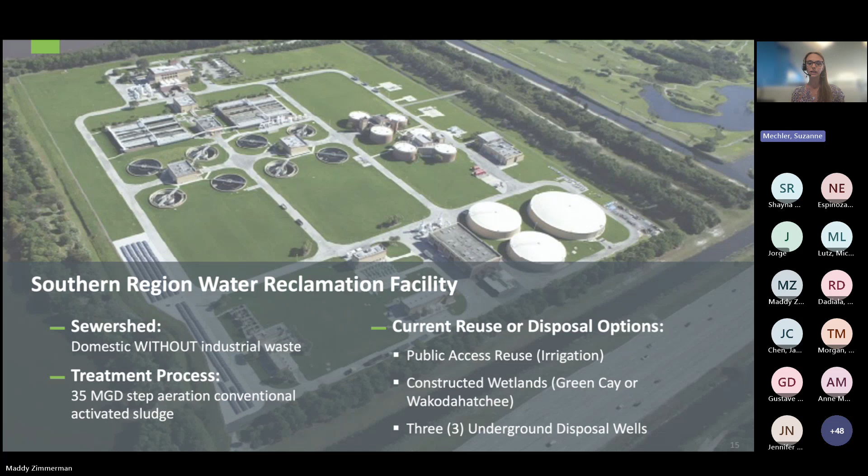They've been using reclaimed water to discharge their created wetlands, raised boardwalks, huge birding locations, and very successful in the community. So this project is going to leverage the reuse to a higher quality level that allows closer interaction with the population. It's still officially indirect potable reuse as defined by the rules. It is treated to drinking water quality and then stabilized for the lake system.

The Green Cay Park is being created using existing farmland that Mr. Winsberg, who is an amazing person, about 90 something years old now, decided that he wanted to work with the county to utilize this land for public good, and not sell it for development and other things. So he was a key player in this. You can see how important the location of this facility is for a really successful indirect potable reuse project.

We do have to get it from the water purification facility to the park, but we are able to put wells on the site, and those wells are relatively close to the water treatment plant. So it really connects well with the system. And even though it's not a direct system, the indirect and really aquifer recharge is critical for them.

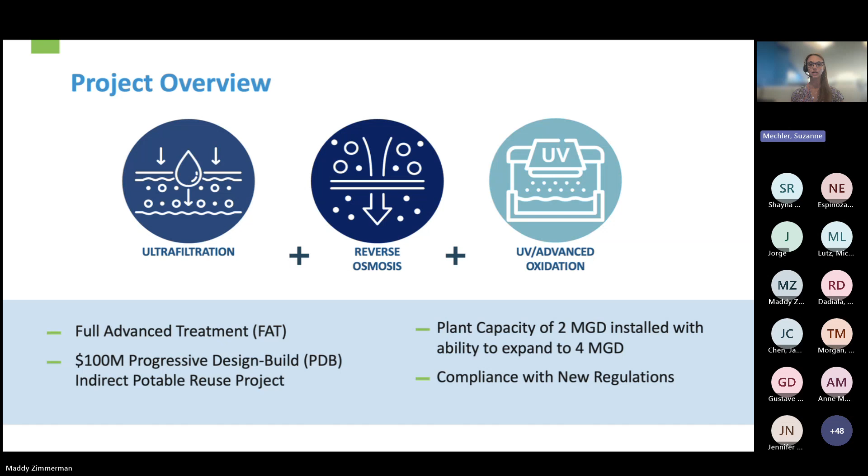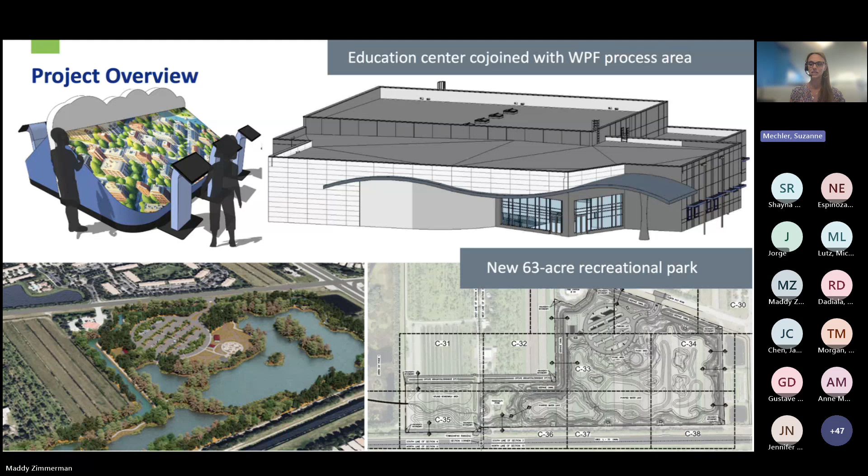I tried to organize this a little bit to talk to this group about how you can connect digital to reuse. I'm going to go through a couple of things that I think are the connectivity everybody should be considering. One of the things we had to do, required for all new projects under the new permits in Florida, is the source water characterization and evaluation.

This is critical because you need this, which is the new requirement, to get approved prior to doing any project. This really sets the stage of what you need to do differently than currently as far as tracking data and understanding the data and your sources. This is an area I think can be leveraged for digital analysis and use in the future, because we do see gaps in the current information used in typical industrial pretreatment programs.

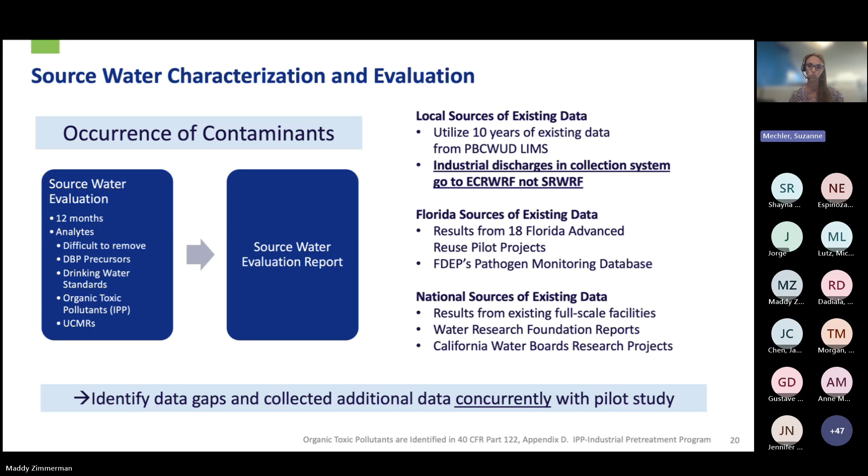This data has been used for the pilot studies. Pilot studies are obviously dependent on making sure you're actually piloting to your source water. So a lot of that connectivity is critical.

Another area we explored during the pilot is really thinking outside the box in how we're able to leverage the data. As part of our full-scale pilot, with all three treatment units connected, we got approved for a Water Research Foundation paper.

It's WRF 5209, which evaluated giving membrane the virus removal credit using rapid in-field molecular-based methods. Our team did a paper, and it's out there, published around February 2023. The key here is that we'll be making real-time decisions in reuse, and to protect the public, real-time information and rapid results are important to prove the success of what you're doing to the community, and to manage issues as they arise. These new ways of evaluating and capturing data in the field in a more real-time, rapid way, especially at this virus level, will be key, and I think it's something all of our projects should consider.

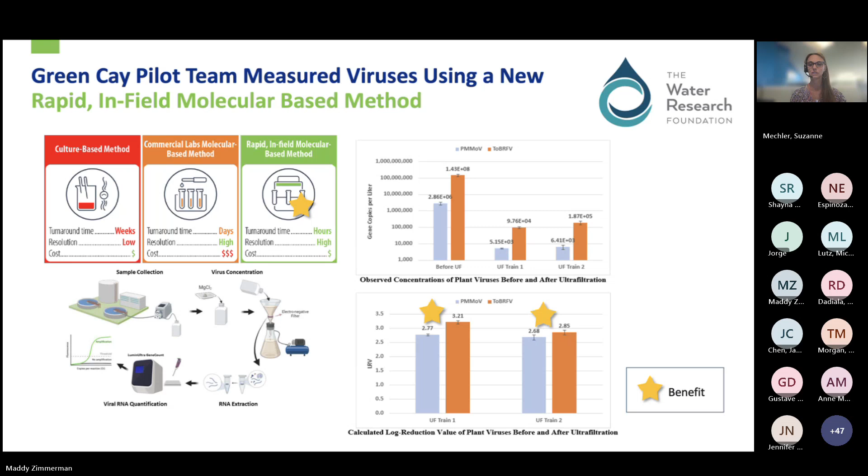I'll try to go into the permitting a little bit. We're following JEA as far as the process, so we'll leverage everything we learned from them. We'll likely be the second one permitted. Similar to JEA, we did all the design originally under the old permit, and we had to work with DEP to make sure our piloting, design, and everything would work under the new rules.

This really focuses on the pathogen requirements, redundancy in the treatment trains, and the UV system, which is a really complicated system with a lot of data associated with it, making sure we met all the requirements. From a permitting status, Palm Beach County is currently in the process of getting the enhanced pretreatment program requirement and ordinances approved. Once that happens, we will submit for a permit. That's the next step.

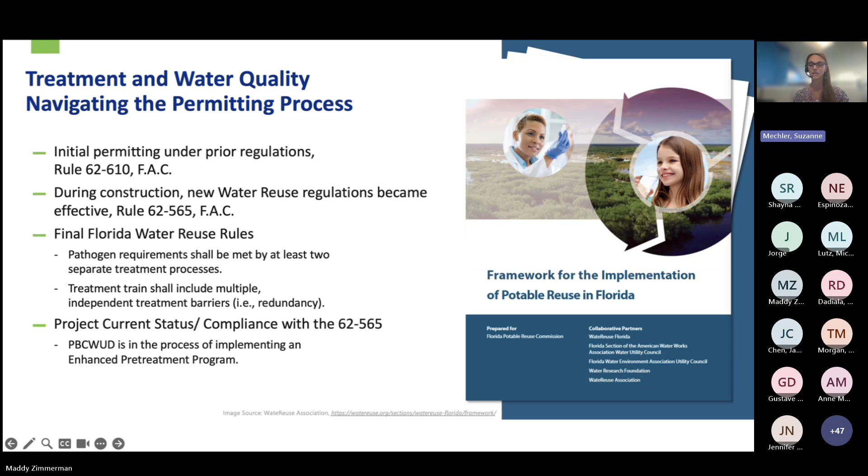Some details I want to highlight regarding the permit, and maybe a little bit of the differences and considerations for each reuse project: we are discharging to a surface water, and because of that, under the old regulations or our current permit, we're defined as a Class 3 limited surface water. But we created these lakes — they're not existing lakes. So we've been working with DEP on the ability to get a variance in the pH.

That allows us a little bit more flexibility in management of the surface water system. We want a stabilized system, and we also have to do toxicity testing. This is another area where there's a lot of benefit in leveraging your water quality and digital information, so you can defend and make sure there's a clear expectation of what your discharge will look like and how you can stabilize that water body. You'll see later that's part of our process. We do have to follow all the typical requirements for the two separate treatment processes, like the log reduction, and our process is currently in compliance with all that.

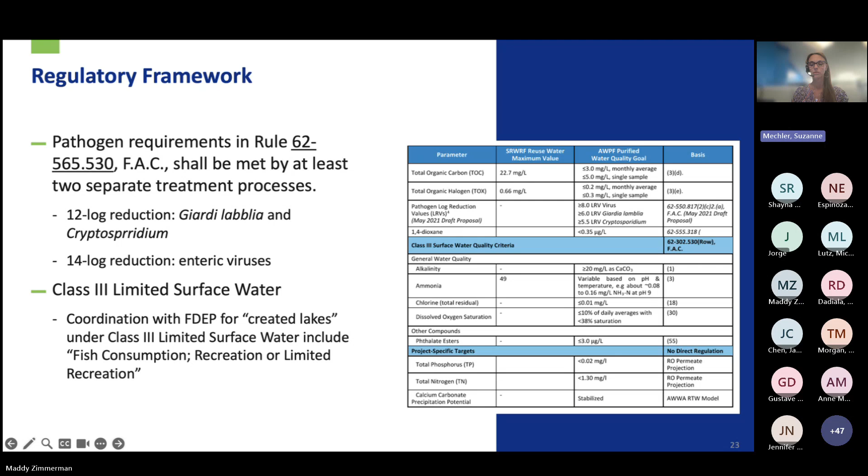I'll just give this to you because I feel like anytime you do reuse, you have to explain the process a little bit. This discussion is mainly to highlight the data and how much of it will be used to support operations. So the presence of free chlorine residual at the end of a breakpoint chlorination — you can see here I have the UFRO and UVAOP, but specific to our plant, we added this breakpoint chlorination. The presence of chlorine residual at the end will be used to monitor and control the process, and may be used to obtain the log credit removal for viruses. We're trying to build some connectivity there.

A free chlorine residual of greater than 0.2, with a chlorine contact time of 15 minutes — there's a big pipe underground maintaining this — helps with virus removal and the log reduction. I think we're obtaining 6-log with that effort. It's also effective at eliminating ammonia nitrogen, though.

So we are injecting sodium hydroxide to increase the pH to 7.5, and like I said, we want a variance to allow us a little bit of flexibility in managing that. But really the UVAOP after that process is all about the stabilization. This stabilization isn't something you'd normally need for a direct potable system, but it's something we're going to need for our lake system. I just want to make that clear, which is why every reuse project is different.

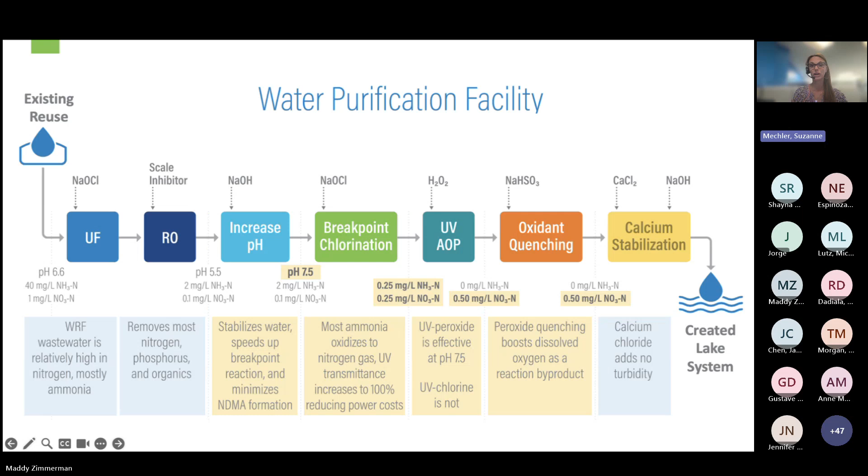There's going to be a lot of monitoring going on. We have 4 or 5 separate chemical treatment systems or chemical systems. So the data is critical in this instance, and we are working now and we're in construction, really trying to connect the dots and make sure that all the data that we're collecting is really being utilized and how it can be utilized to the best of its use, right?

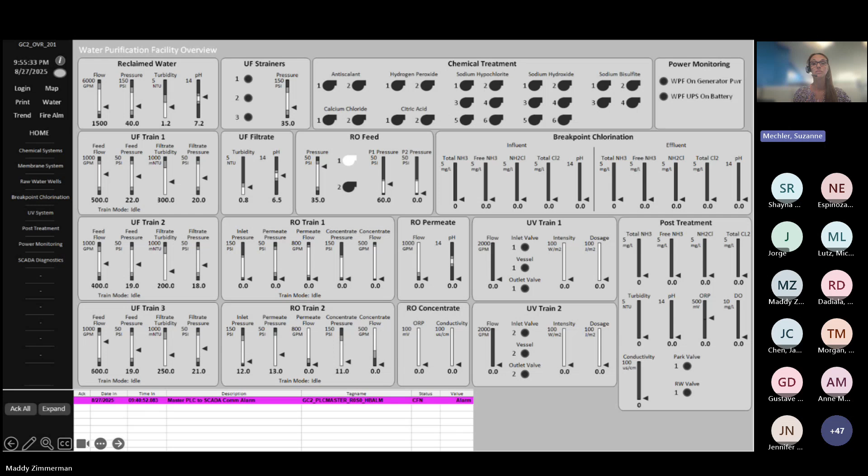And I think the trend that we all are seeing is that we really need to leverage the information and not put books on shelves, but really figure out how to incorporate it in the daily lives of an operator and make their life easier, but also give them more information to make better decisions. So this is all part of the process of what's going to be done, hoping that it can transition into leverage of this data.

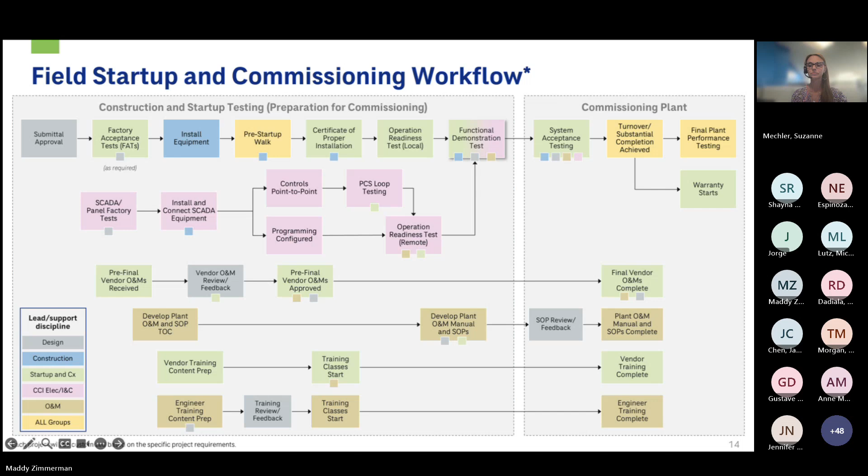Next slide. So that's all I have on the Green Cay project, and I'm going to go through a couple of other high-level things.

I wanted to end my talk by going through a little bit of the connectivity. And this is really based on my experience with Green Cay. I do think there is a huge connectivity between reuse and digital. So I'm going to highlight some of the things and areas where I can see that.

First of all, and I talked about this, utilizing R&D to support the wastewater data tools, right? We are going to see a huge ramp up in the amount of reuse projects, and also that means a huge ramp up in data collection as well as identifying mechanisms to get buy-in from the public. And this R&D is really important to make sure that we look at those methods, we vet those methods, and then we figure out how best to use them.

Another way is to really understand where the risks are coming from, and DEP's effort in this enhanced pretreatment program is really a start of that, and that can then be leveraged. Knowing better where all your source water is coming from can better help you manage the back end, and really identifying the risks and tagging them and using data to do that.

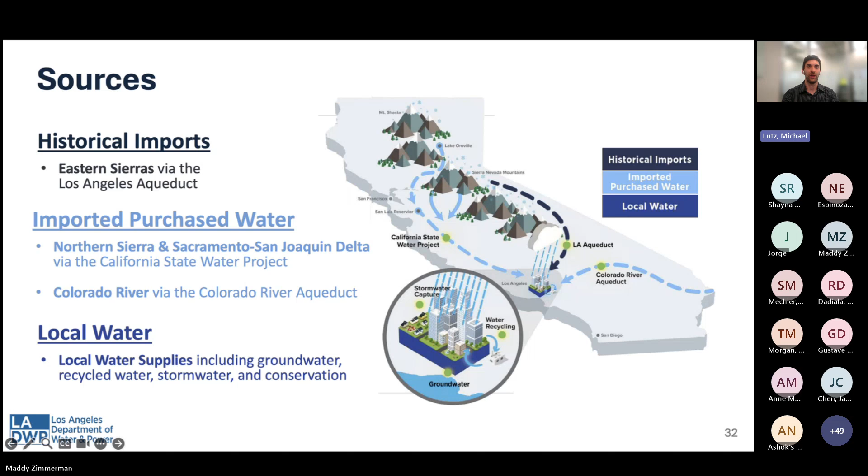Recycled water is a really critical part of the picture here for Los Angeles. We've been supplying non-potable recycled water for over 50 years, through our four wastewater treatment plants and 70 miles of purple pipe.

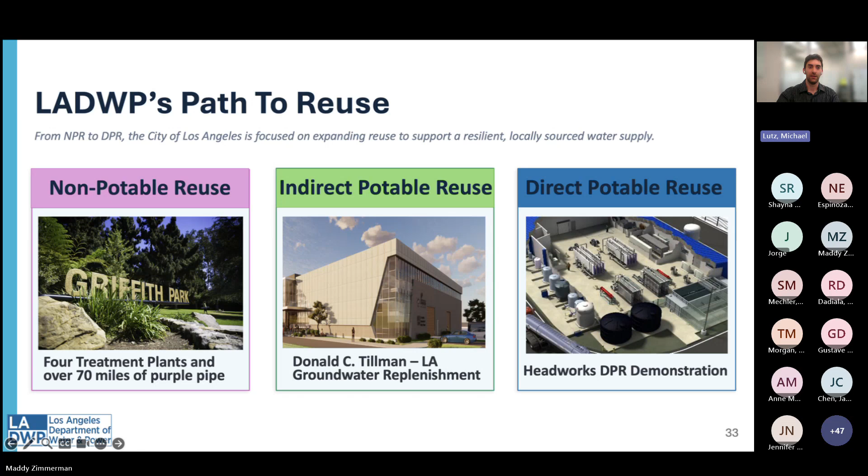More recently, we are currently in construction of the Donald C. Tillman Los Angeles Groundwater Replenishment program, a $1 billion project that will begin delivering water for aquifer recharge by 2028. Looking towards the future, we are going to implement a direct potable reuse program. The difference between indirect and direct is that there's no environmental buffer, so the treatment requirements are a lot higher, and so are the monitoring requirements.

The objectives of our demonstration facility, which is still in the planning phase, will pave the way for all future direct potable reuse projects, such as Pure Water Los Angeles. To make that possible, the demonstration facility will help develop our workforce, research, public outreach, and engage with regulators.

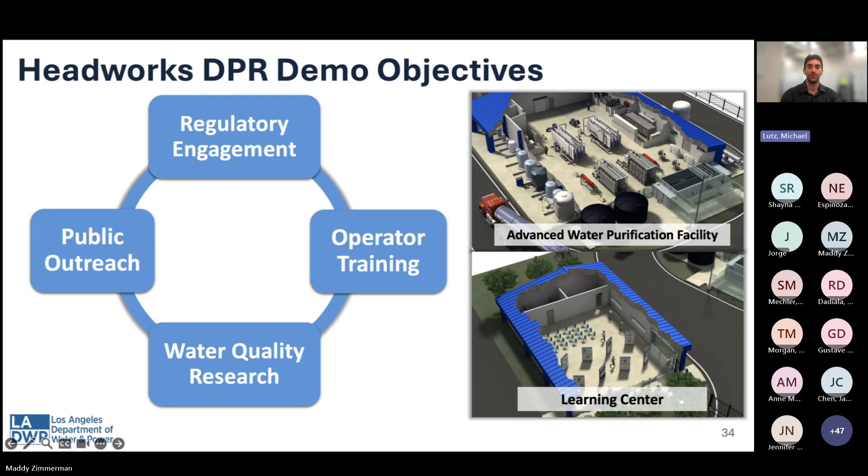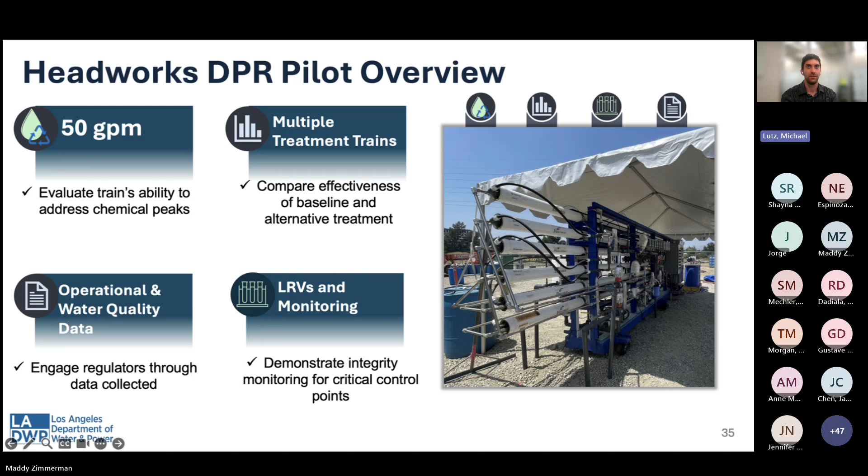We currently have a 50 gallon per minute DPR pilot. We've been operating for about 6 months, and we are comparing the effectiveness of the baseline treatment in the California regulations with some alternative treatment trains.

So this is just a high level overview of the California DPR regulations. These are under Title 22, and they were adopted in October 2024. They provide a comprehensive statewide framework for direct potable reuse. There's 2 main treatment elements to the regulation.

There's chemicals and pathogens. For the chemicals, we need 3 distinct removal mechanisms and at least 3 treatment processes. So there's a mandatory order of those processes: ozone, followed by biological activated carbon, followed by reverse osmosis and advanced oxidation. And that order is fixed and you can't move it around.

And then moving towards the pathogens, there are 3 distinct pathogen removal mechanisms that you need, across 4 processes. Each one must be greater than 1 log reduction value, and no process can be given more than 6 log reduction value, and that's so that you don't overly rely on a single treatment process.

And for the design targets, we need to reach 20 LRV for viruses, 14 for Giardia, and 15 for Cryptosporidium.

Now, for those who are not familiar with that terminology for log reduction value, let's say that we were to start with 100 units of a contaminant, and our treatment process can remove 90 of those, so you're left with 10. That would be considered 1 log reduction value. If another treatment process reduces it by 99%, leaving 1 unit in the effluent, that would be 2 log reduction value. And so you can see how stringent the design targets are.

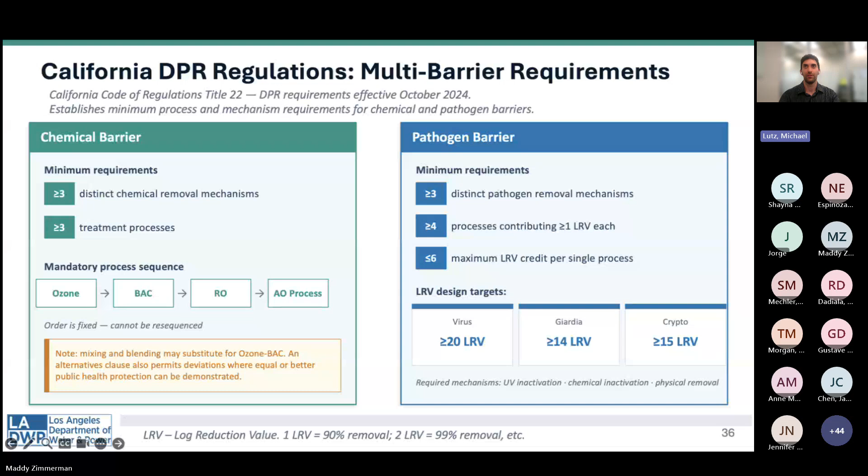So the challenge is, how can we accurately measure that level of removal? Are we able to measure concentrations that low? And if not, how are we able to prove that we're getting those log reduction values?

So this is the 5 layers of the SWAN framework, and I just really liked how this gives you a nice way to think about the different elements of data and digital technologies. So the first one is physical treatment, followed by online monitoring and sensing, followed by collection, communication, data management and display, and data fusion and analysis.

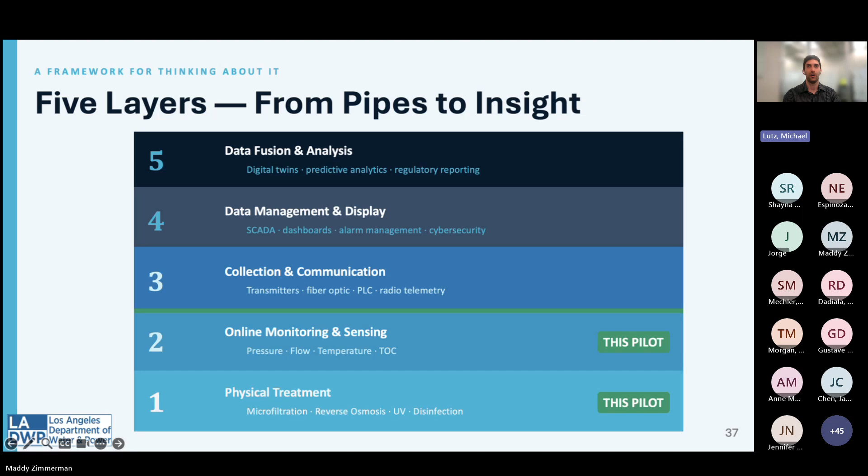So for our pilot, we're really focusing on the treatment processes, the physical treatment, and the online monitoring and sensing.

So here you can see the treatment trains for our pilot. Train 2 is the baseline treatment train in the regulations. We have ozone, followed by biological activated carbon, ultrafiltration, reverse osmosis, UV AOP, and then free chlorine. In our alternative trains, train 1A and 1B, we remove the ozone BAC and we add some additional post-reverse osmosis processes, including air stripping and GAC.

So across each of these processes, we have numerous sensors: pressure, flow, temperature, pH, chlorine residual analyzers. We're collecting tons of data in order to evaluate these two processes. And we're also collecting a lot of grab samples that we send to our laboratories.

And I saw a couple of members of our Los Angeles Department of Water and Power water quality laboratory here in the meeting. So great to have you guys here today. They've been supporting our pilot project, and they've been taking a lot of our samples and analyzing them.

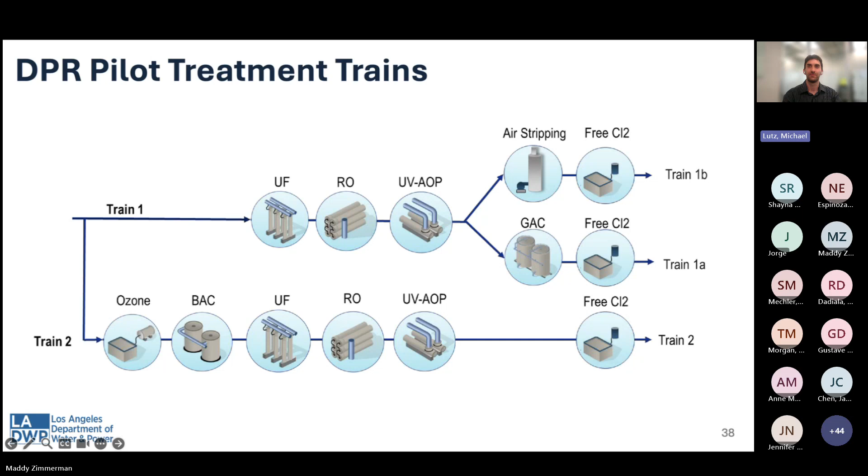So the limiting factor in each case is monitoring. For DPR, you need continuous monitoring to prove the treatment efficacy of each process.

For ultrafiltration, for crypto and Giardia, we get 4 log reduction values through pressure decay testing. And if there's ways to improve that pressure decay testing, that can give us more LRVs.

For virus removal, we know that the ultrafiltration can remove viruses, but currently there's no way to show or prove that that's approved by regulators. So there's opportunity there to increase.

And finally, for reverse osmosis, this is one of the most effective treatment processes. However, it receives only 1 or 2 log reduction values currently. And so there's definitely opportunity to increase that. And so that's what we'll focus on for the rest of the slides here.

So conductivity is the baseline way that we measure the effectiveness of reverse osmosis. It's able to detect dissolved salts and ions, but it's only able to give us 1 log reduction value. It's a really simple technology. It's reliable and effective, easy to maintain and operate, and inexpensive. And so this is what everybody uses to obtain 1 log reduction value.

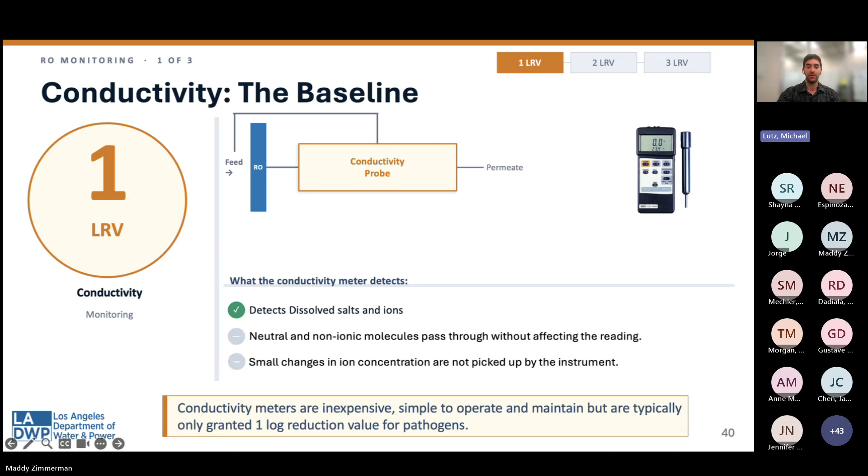Now, the next level to achieve 2 log reduction values is the Sievers M9 unit. That's able to detect total organic carbon in the low parts per billion range. The downside is that there's no competitors or even laboratory methods that we can use to verify the performance. It's very expensive, between $40,000 and $50,000.

But it is an effective and field-tested technology. Even for the application of DPR, although it's been done for IPR, additional validation studies may be required. So again, there's a lot of cost and technical barriers for implementation.

And then finally, we'll cover one of the emerging technologies for monitoring in reverse osmosis. It's sulfate rejection, and it can detect sulfate in the low parts per billion range. Sulfate is a divalent negative ion, and viruses are also negatively charged, so it's a good surrogate. The downside of this technology is that it's extremely expensive. It costs over $50,000 per unit.

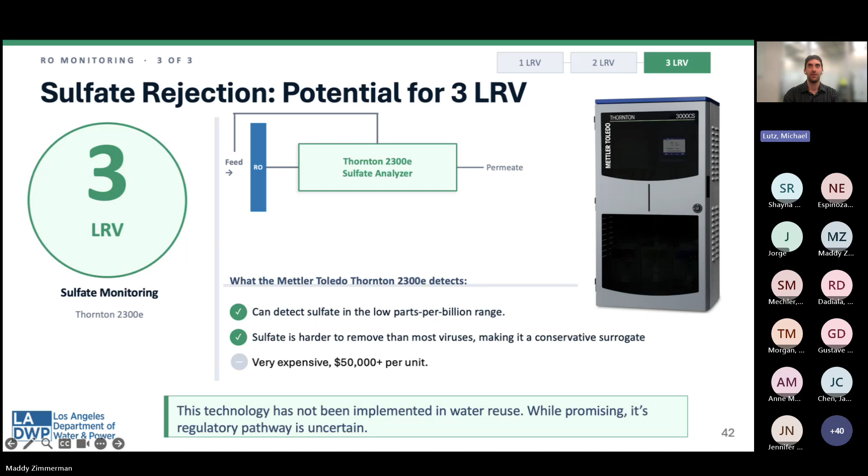This has not been implemented yet in water reuse. So it's a promising technology, but a lot of work will be required to get regulatory approval. We actually do have one of these units at our pilot, and we plan to test it out in our next phase of testing.

I'm just going to talk about a few of the other requirements for direct potable reuse in which digital technologies are essential. And these are non-treatment barriers. Early detection and time to respond is really critical.

Placing sensors in the sewer collection system, we're able to detect unusual contamination before it reaches the plant. Alerts are triggered if the readings go out of range, and that gives operators the opportunity to respond. In addition to that, we have break tanks, storage tanks, and reservoirs between the treatment and the distribution systems. So that gives another buffer.

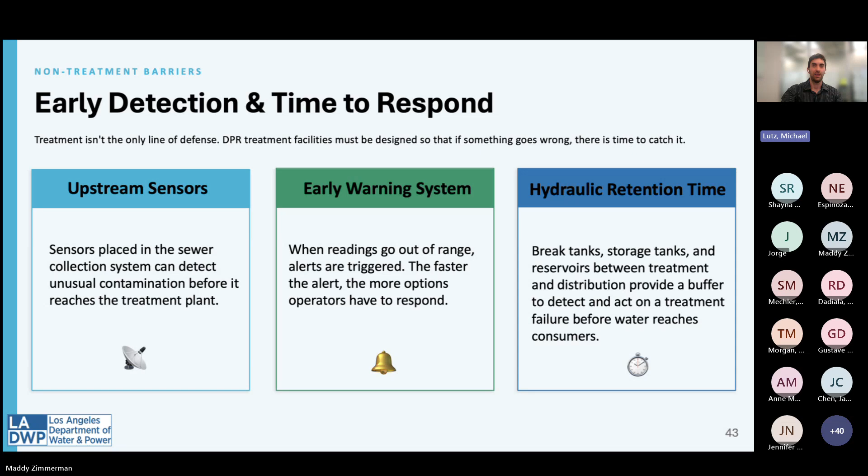So if something goes out of range, the operators have an opportunity to react. They can divert the water, or they can take other measures to treat the water so that we make sure to deliver safe water for our consumers.

In addition to that, there's additional operational safeguards. There's something called a critical control point. It's built into the DPR regulations, in fact. This is something that's been used in the food industry for food safety. You identify specific points in the process where the failure would result in compromised quality.

As soon as a reading crosses that threshold, there's an automatic response. It could either divert the treatment process or take other measures, and it's automatic. So it's another way to prevent unsafe water from reaching consumers.

So redundancy. You don't want any single instrument or treatment step to be the only safeguard. You need backup sensors and multiple barriers to ensure that one failure doesn't become a public health event. And then finally, finished water monitoring, that is an independent check before water reaches the consumers.

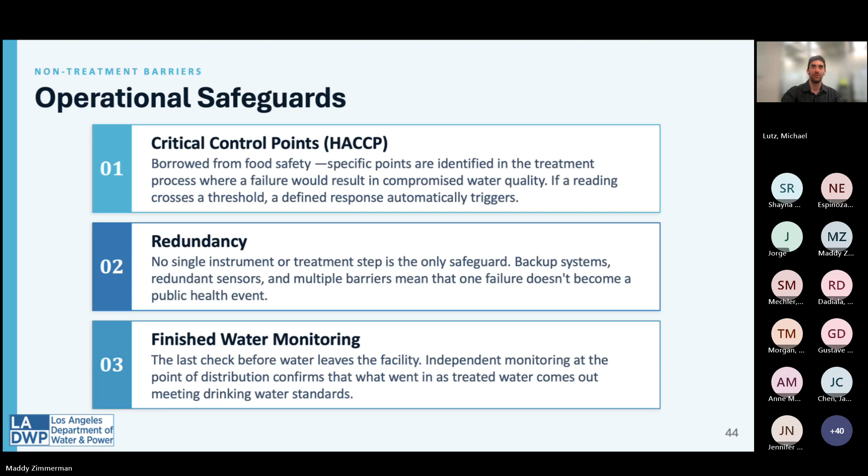In sum, direct potable reuse lacks the buffering and response time that's provided in indirect potable reuse, making real-time detection essential. So that's where a lot of the opportunity lies, is developing those technologies for real-time verification and operational frameworks. A lot of these technologies exist today, but there's a lot of barriers.

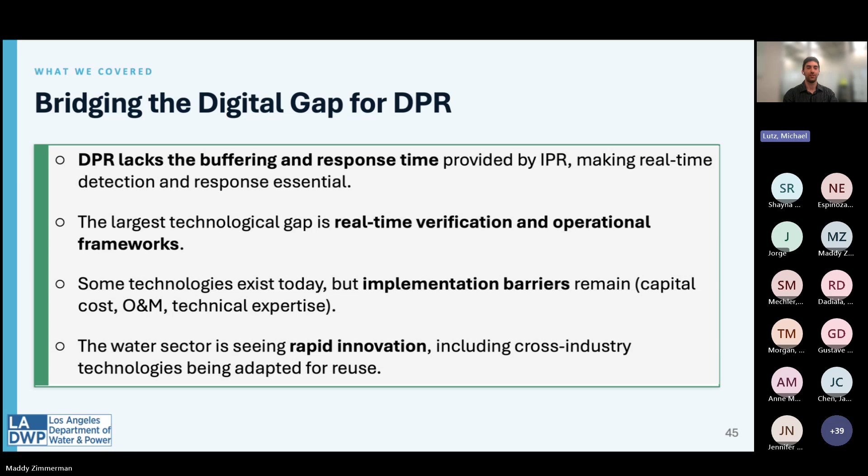Capital cost for sensors, you need the technical expertise to monitor those sensors, the workforce, and operation and maintenance. So in sum, it's a really exciting time for the water sector, and there's a lot of innovation going on and different technologies from different industries being adapted for reuse.